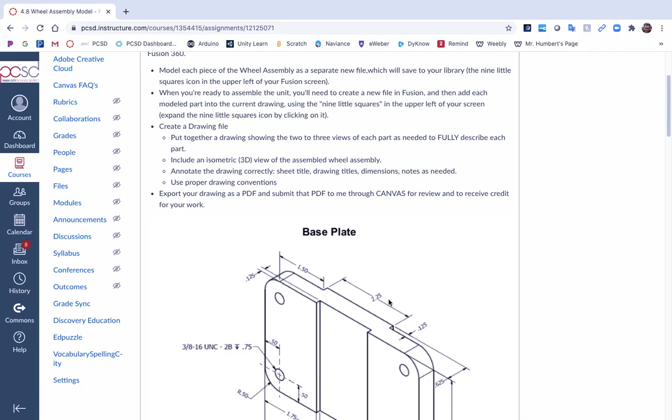So I'm going to swipe and show you this assignment here in Canvas. You're modeling these 5 or so parts: the base plate, the brace wheel support, the axle, the wheel, and the bushing, in Fusion. Then you're going to take those 5 parts and assemble them also in Fusion.

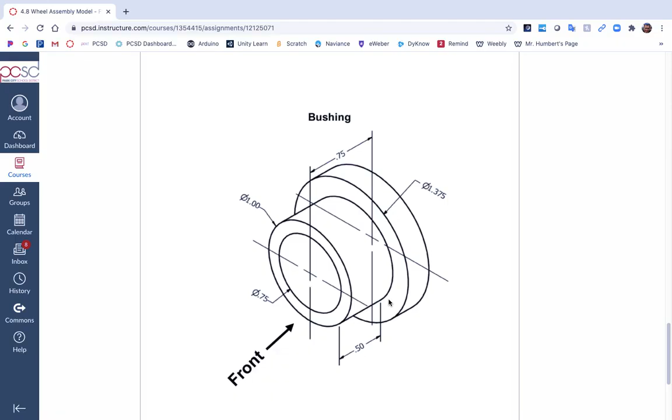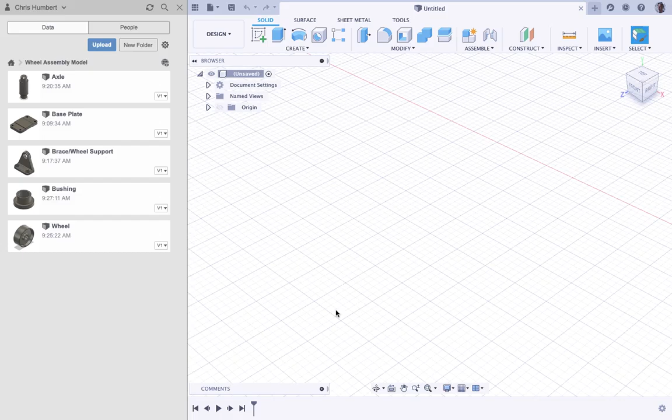The way I would recommend you do this is you model each part as a separate file. I'm going to cover how to build the base plate in this video, and I'll have other videos for the other parts. So if I swipe over here, I have a new file right here that we're going to use to model the base plate. I'm hoping this will be about a 10-minute video.

So let's come back over here and we'll just start. This plate, overall dimensions, I'm going to start with kind of an overall rectangle: 5.25 by 3.25.

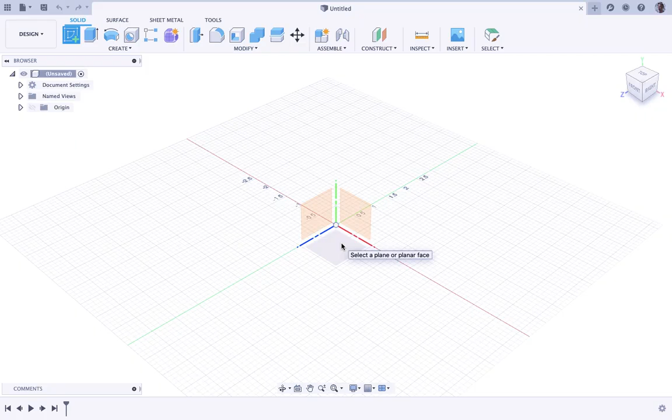So I'm going to make a new sketch. Let's see, waiting. Why can I not see it? There it is. Okay, pick a plane. I usually work on the bottom plane just because that's the way my brain works. It doesn't really matter, you just need to draw your shape as a sketch, and then you're going to turn it into a 3D object.

So I'm going to take a rectangle, and I usually just pick in a random place. I don't tend to start at 0,0. I think it's easier to start randomly.

Also, before you do anything, let's go into document settings, make sure it says inches. If you're still in millimeters, you have to click this change settings, change it from whatever it is to wherever you want. We want to be inches because we're in America. I usually click set as default and then hit OK. Since I'm already in inches, I don't need to change anything, that's why it's grayed out. Okay, so again, document settings.

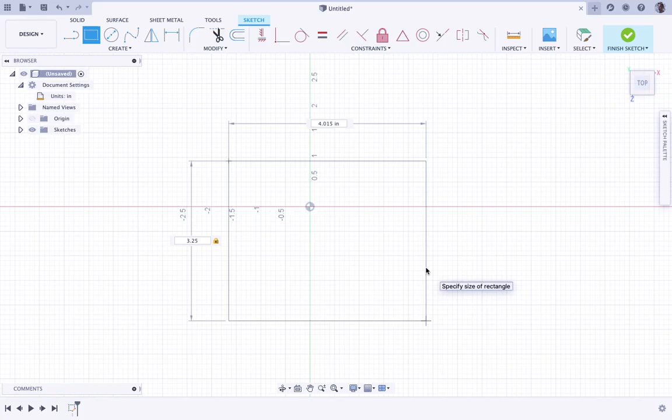Now I'm ready to use my rectangle tool. And I can see that the vertical dimension is highlighted, so I'm going to make that 3.25. If I tab over, I can make it 5.25. Okay, and then I'm going to hit Finish Sketch, and there's my rectangle.

Then we want to extrude it into a 3D object. I'm swiping back over. I have to look at all my dimensions and figure out how thick to make it. This says 0.625, this says 0.125. This would be subtracted from this to get this thickness. So I think the easiest would be to start by 0.625 minus 0.125.

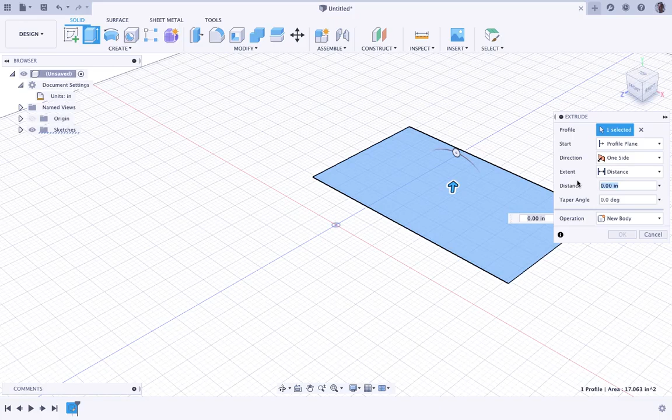So I'm going to go to the Extrude tool. It's going to go up. Here's my distance. Let me show you something we may not have known: you can do math in here. I can go 0.625 minus 0.125, and it does math for you, and it's a half inch. So that's kind of cool.

Remember, the home button takes you kind of centered on your shape. So that's the first start of our object. Then...

Let's do this little recess in the middle. 1.75, 1.75. The reason the middle isn't dimensioned is you should never dimension everything all the way across. One practical reason is because if the computer rounds and rounds and rounds, and those 3 rounded dimensions don't add up to this dimension, we have a problem when we go to manufacturing.

So you always would do an overall and then dimension. You really should dimension your 2 more important dimensions. In this case, they decided this is a critical dimension, that's a critical dimension. If this recessed area is off by a few 1/16 of an inch, it's not the end of the world. So let's remember 1.75, 1.75.

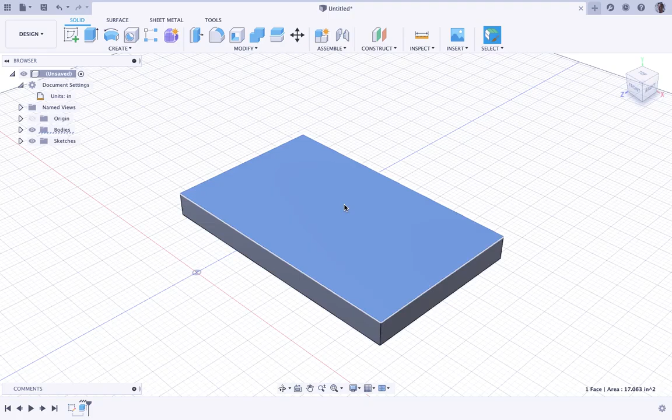So here you need to click. You need to either go Create Sketch on the button, or if you right click with a mouse, or if you 2-finger click on your pad, you can get Create Sketch. You need to make a new sketch. And then you're back into your sketch tools.

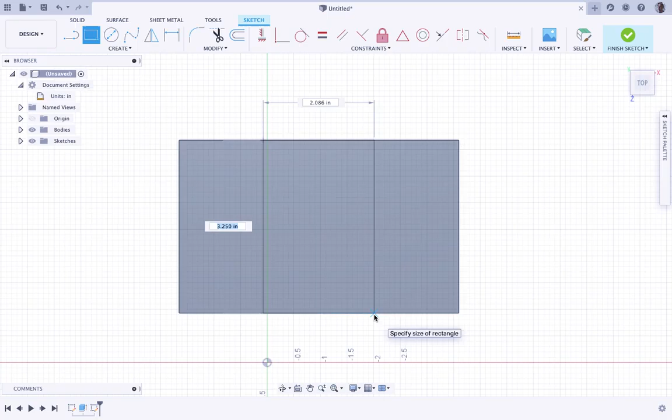I'm going to do a rectangle, and I'm just going to eyeball it, kind of rough it out. Make sure you're on the edge. Okay, and then to make it exact, you want to use the dimension tool. If the dimension tool isn't up here on your screen, you can go down in the pull down menu, it's at the very bottom.

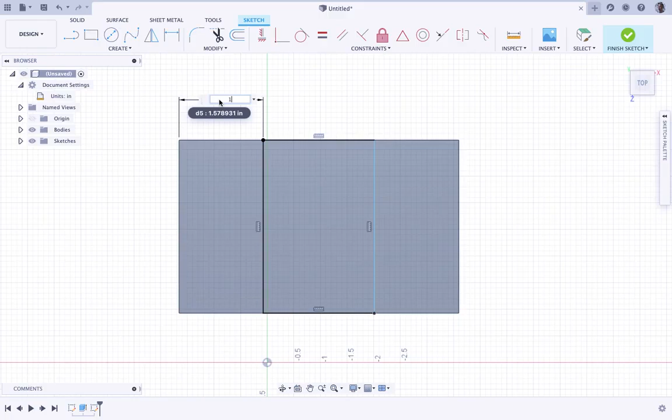And I'm going to dimension from that edge to that edge, and then I go out. Usually you don't want to put dimensions in here because it's much cleaner if you go outside. And that should be not that random number, but 1.75, enter. You see how it moved it over. Then I'm going to do the same thing. It's still highlighted, so I'm still in the dimension tool.

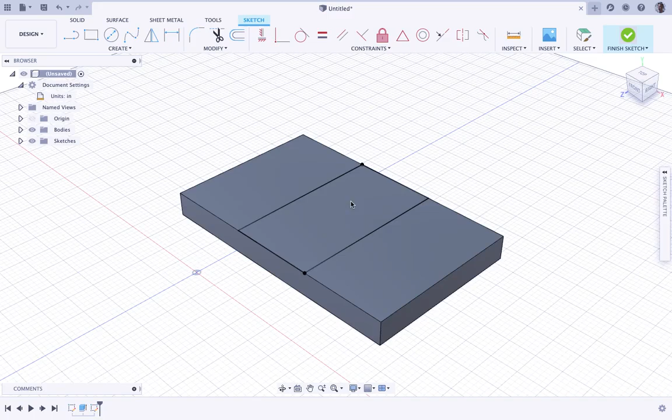And do it again, 1.75, and this time it makes the rectangle smaller because these are locked in. Okay, finish the sketch, and now I can extrude any one of these three shapes. I'm going to extrude the middle one.

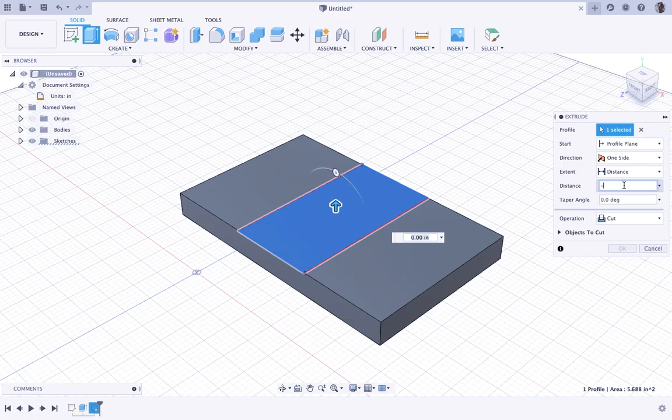Instead of going up, we're going to do a cut dimension. So instead of doing a new body up, we're going to do a pull down and make it a cut. And your dimension here is going to be, since it's going up, I'm going to do a negative, and it'll go down. I hit OK, and I just cut that little groove out. Okay, so there's my groove in the middle.

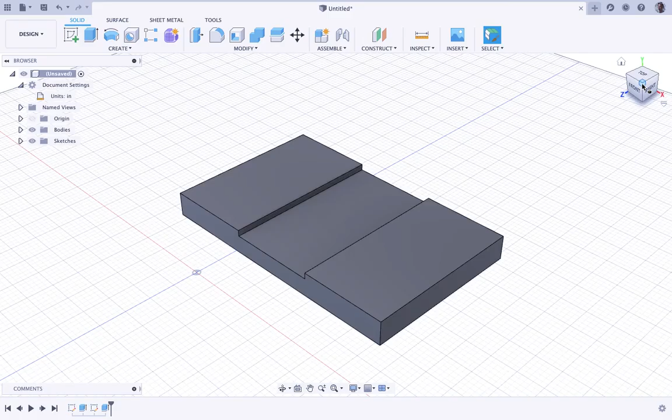Let's do the backside extension out the back. Okay, so we have to do a new sketch on the backside of this metal plate. So I'm going to take a corner and slowly turn it around. Kind of get it like that so it looks doable.

Again, create a sketch, but tell it where you want to create your sketch. I like to right click, create sketch. Rectangle tool, again, make sure you're on the edges, and then use the dimension. And how big is that rectangle again?

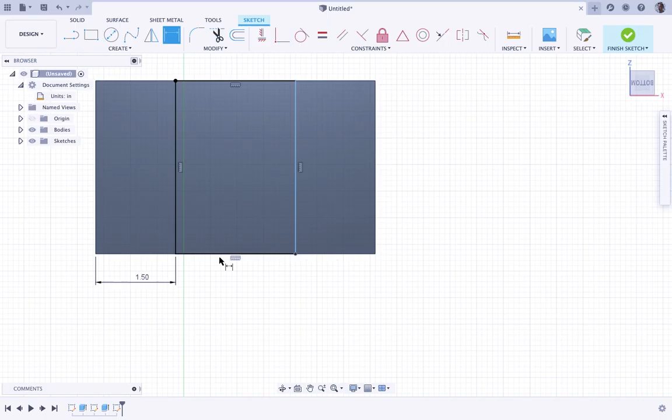Make sure it lights up. Okay, from there to there, 1.5, enter. And then since I'm still in dimension tool, I can either pick that line and that line, or I can just do that. And then this is going to be 2.25, enter. Okay, and that's exactly what that said, 1.5 and 2.25.

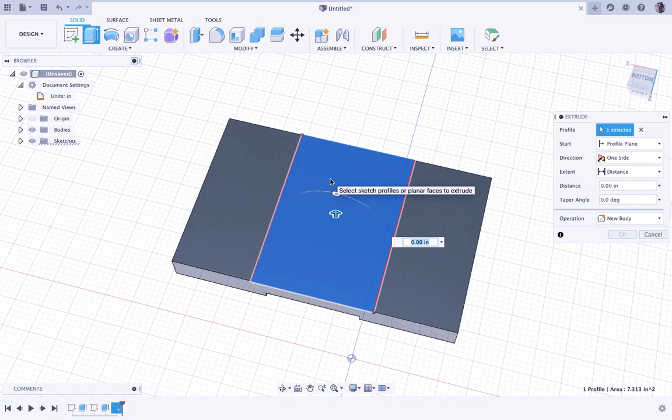Finish that sketch. Extrude that one. That should go up 0.125. Enter. Okay, and now you can see I have this extrusion out, I have an extrusion in.

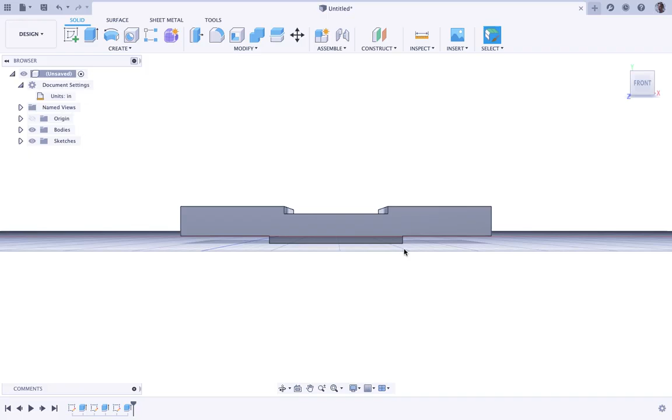Notice that they don't line up. Okay, if I go to the front view, you can see how that line does not line up with that line. Okay, and in real life that would be important, because if they were lined up exactly, you'd end up with a skinny part right there that could be a breaking point in this metal plate. So they go past it, which is making it stronger.

Okay, let's go back here. Why don't we just do this curve in the corner? That's called a fillet. That fillet is a 0.5 radius. Fillet tool is a really nice, easy tool to use. It's right there.

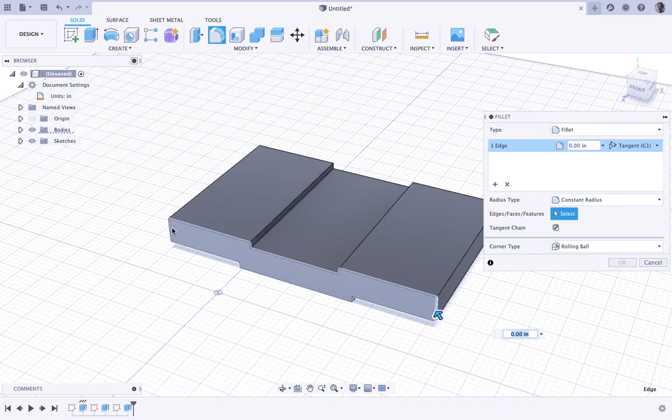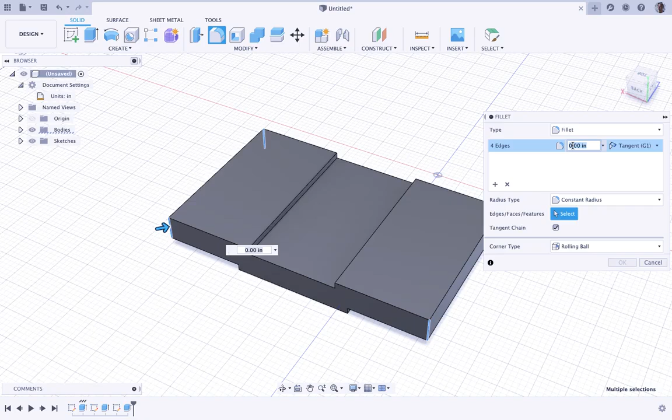Click it. Click. Click. I'm going to turn my cube with a corner carefully so I don't end up upside down and lost. And since I'm still in the fillet tool, I can go click and click. I've got all four selected. It says 4 edges. There's my radius. I like to triple click it, make it say 0.5. Looks beautiful. You can see it looks right, and I can hit OK.

Okay. I think the only other thing we have to do is these holes. That's the hole designation. The best way to do holes is to mark the points and then use the hole tool. That's how you get these. This is a threaded hole, and I know because it says 3/8-16 UNC 2B.

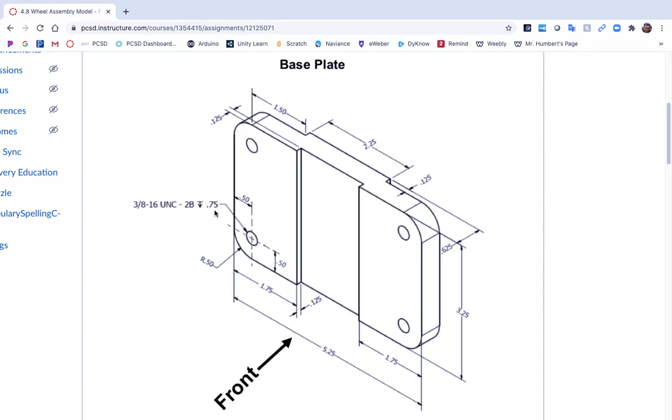That's a thread type. Okay, this arrow tells me the hole is 3/4 of an inch down, but this metal plate is only 5/8 inch thick, so it's really a hole all the way through. So I would have just had this say through. I think down here we've got a through hole. See that? I don't know why they chose to use a hole with a certain depth, but either way, you're going to get a hole all the way through. And then that's the size of the hole, that's the thread pattern.

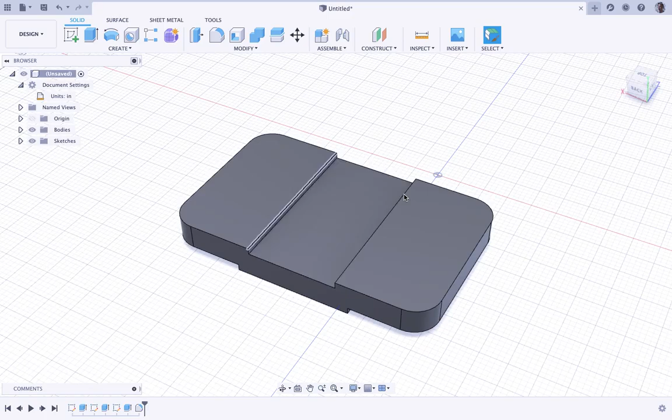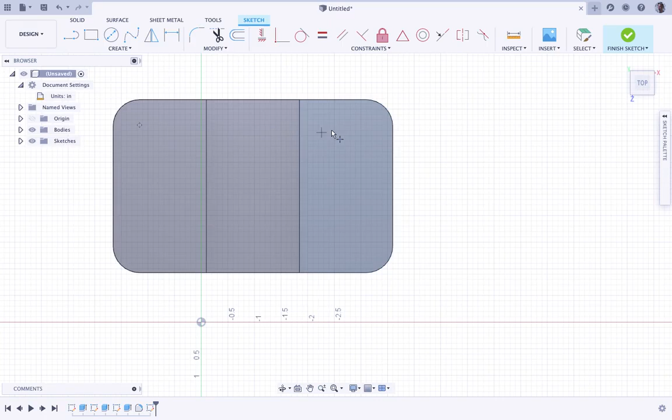Okay, so we're going to have to mark 4 points first. If you can remember 0.5 and 0.5 from each corner, we'll just use the point tool. So again, you need a new sketch, click on a face, create a sketch, and then what you want to do is, I don't see the point tool, so it's hidden right here. There's the point tool. Okay, you can possibly find the center point, but I don't see that it's telling me that, so I'm just going to randomly mark some points.

Okay, and then I'm going to use the dimension tool to make sure they're in the right place. So I'm going to go point to edge, should be 0.5, enter. Point to this edge should also be 0.5, enter.

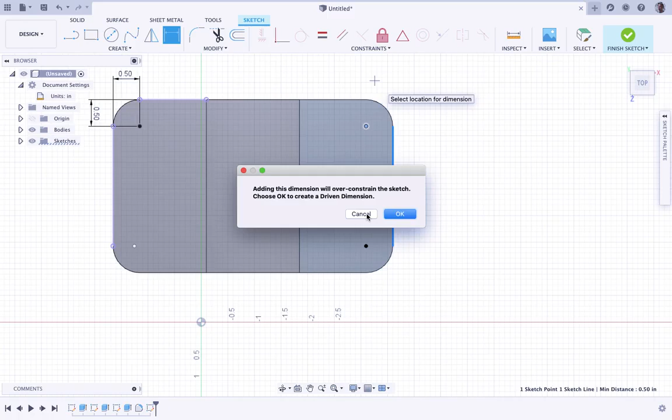And do that all the way around. That one said it's going to over constrain it, because it found the center point, so I don't need that dimension. Let me just double click it to make sure. See, that one didn't find the 0.5... oh, no, it did, so we're all good. This is actually a good error message.

You can hit OK, but it puts the dimension in quotes, which means it's not a dimension that will drive that location, it's a dimension that's driven by the location. It knew where this point needed to go because it found the center point of this arc, which is a 0.5 arc, so I'm just going to delete that dimension. We don't need it.

Let's see if this one... that one's also a 0.5, so we don't need that one. How about dimension... oh, it didn't want to dimension those two lines. Okay, I want to dimension that point to this edge. It's also 0.5, we don't need that one. This one looks like it's messed up though, see that one is like...

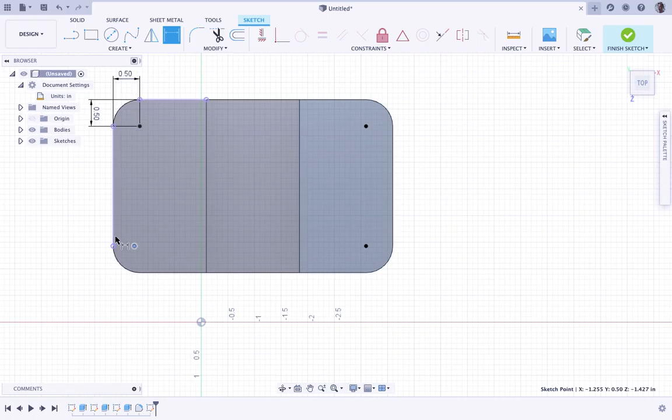Let me find it again. Dimension that point to that edge. Okay, we don't want it to be 0.399 something, we want it to be 0.5 exactly. Point to that edge, it looks like it did find it. Maybe it didn't, but I'm going to make sure it's 0.5 exactly. Enter. Okay, so we've got them all laid out the right way.

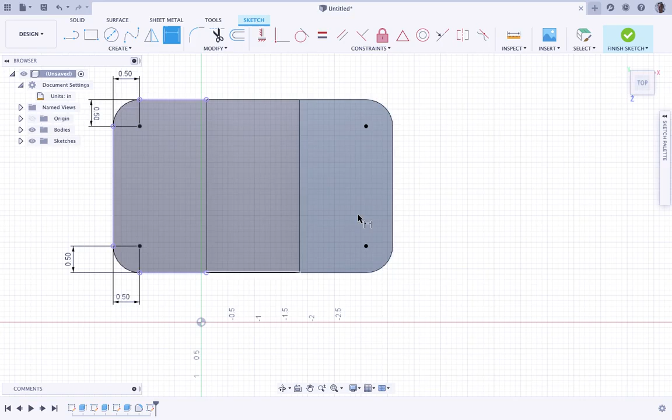Now when I finish the sketch, I can use the hole tool, and sometimes it automatically finds the points, sometimes it doesn't. If it doesn't find the points, you just have to click on the points.

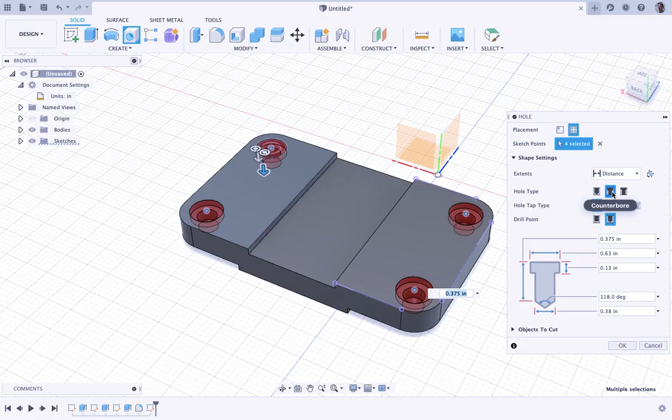And then you have to make it the right type of hole. So what we want is not a counterbore, but a simple... we don't want a simple, we want a tapped, which is another word for threaded. You can see the threads now. We don't care about the drill point because it's going to go all the way through. We can either use distance and type in the 0.75 depth here, or go all the way through, and then you don't need to worry about depth because it just says all the way through.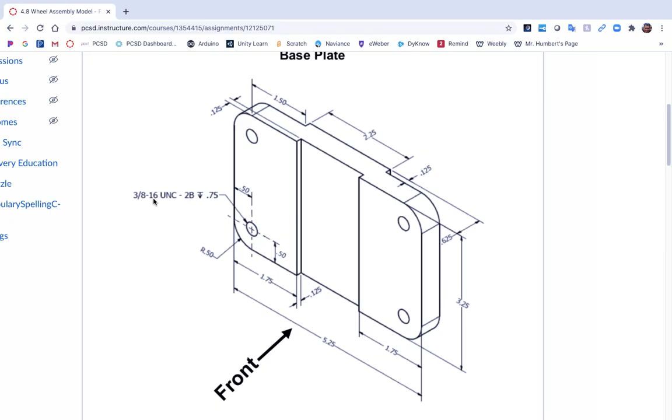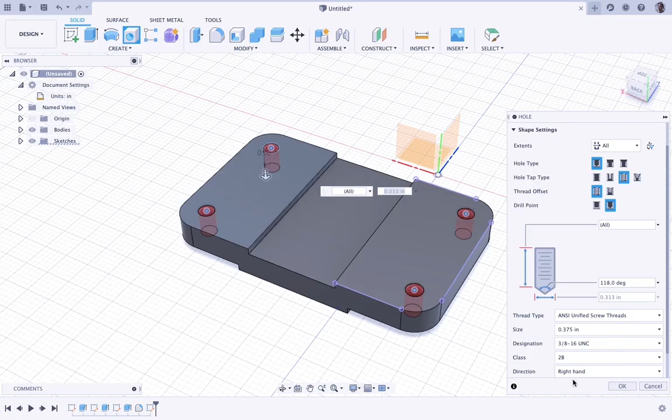Okay, then we just have to put in the size. If I look here, this is the size of the hole. If I go back to my drawing, the size of the hole is 3/8 of an inch, and we need these threads, 16 UNC 2B. So we want to go right here, 3/8 of an inch, so that's good. 16 UNC, it already picked that once you put in the size here, but then we need to change the class to a 2B, slightly different thread. And then you just hit OK, and there's your beautiful threaded holes.

Something cool on these, I think, if I double click the hole tool... can I double click here? I wanted to show you how you can change it from a visual of a hole to actually modeled threads. I don't remember where it was, maybe I have, let's try this. I'm not going to save it yet, I'm going to make sure everything's in here that we need, and then I'll save it. I think we've got it all. We have threaded holes, we have fillet corners, we have the recess, we have the extension out.

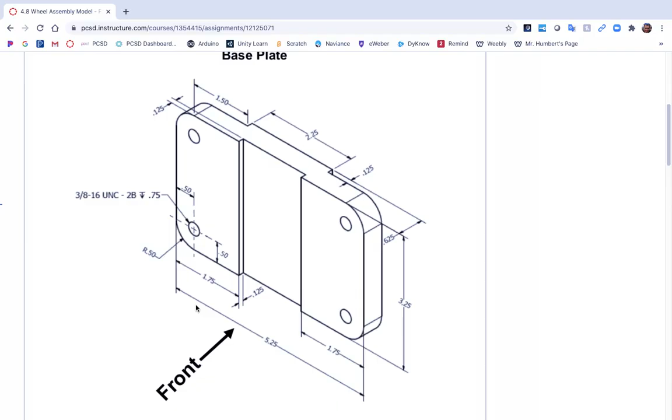So this thing looks like it's all done. I'm going to hit escape a few times to make sure I'm cleaned out, and then I'm going to hit save. I would recommend you make a folder. I have one already created because I built these previously. Make a folder and probably call it wheel assembly model, so you can find it later. You could make a new folder if you wanted, and then you're going to call it whatever it is.

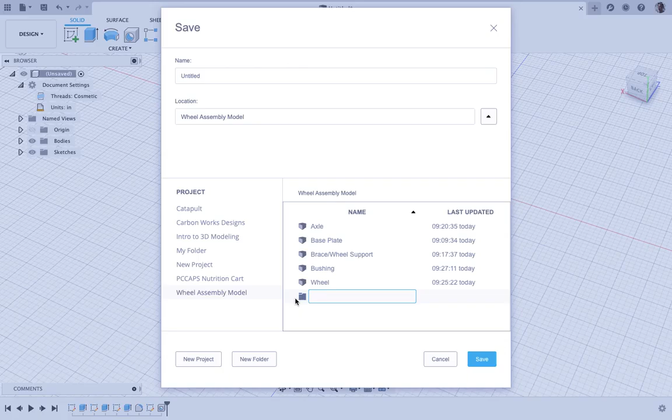Then call this part... this is going to be baseplate. I'm going to call it baseplate 1 because I think I already have another baseplate in there. Save. There's my baseplate 1. If I go into my data panel, I have this folder called wheel assembly model. In there I have my baseplate 1 I just made with you guys, and I have a baseplate I made earlier.

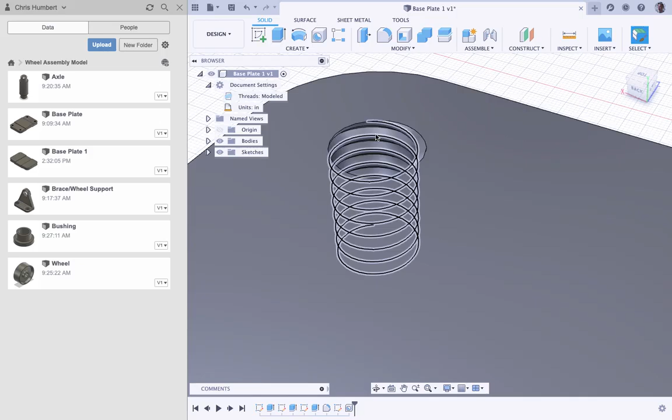That's it, I'm not going to worry about the threaded holes. If you want to figure that out and you can't on your own, you can always ask me. Oh, here it is, threads, okay, cosmetic threads, and I was like, what does that do? If I click it, you can make it not cosmetic, but actually model threads. And you hit OK, and see, now these threads are actually like actual models of threads, which is pretty darn cool. So if I 3D printed this, these would actually be threaded. Very cool. So it's right there, document settings, threads.

Home view. I'll hit save again. I'm just going to say OK. And that's it. End of video. Thank you.